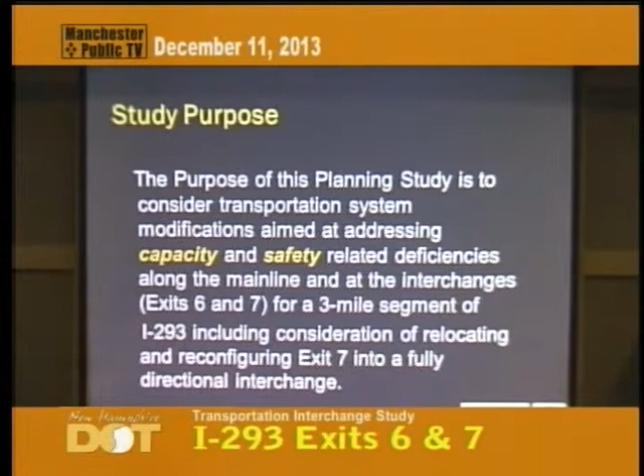Study purpose, we talk about this at each meeting. The purpose of this planning study is to consider transportation system modifications aimed at addressing capacity and safety related deficiencies along the main line and at the interchanges, exit 6 and 7, for about a 3-mile segment of I-293, including consideration of relocating and reconfiguring exit 7 into a fully directional interchange.

We've been working very closely with the Technical Advisory Committee. They've been very helpful to us throughout the process. That committee included not only the New Hampshire Department of Transportation and the Federal Highway Administration, but also representatives from the Southern New Hampshire Planning Commission, representatives of the City of Manchester, the Town of Goffstown, Town of Hooksett, the Greater Manchester Chamber of Commerce, the Hooksett Chamber of Commerce, the Manchester Community College, and also Senator Boutin sits on that committee.

Throughout the study, we've really tried to focus on public outreach and provide as much information as possible. And in doing that, as I said, we've had 5 public informational meetings. So this is our 5th and final meeting for this planning study. We also met 9 times with the Technical Advisory Committee. And then we had a series of briefings with each of the communities: we met once with the Hooksett Town Council, once with the Manchester Board of Mayor and Aldermen, once with the Goffstown Selectmen.

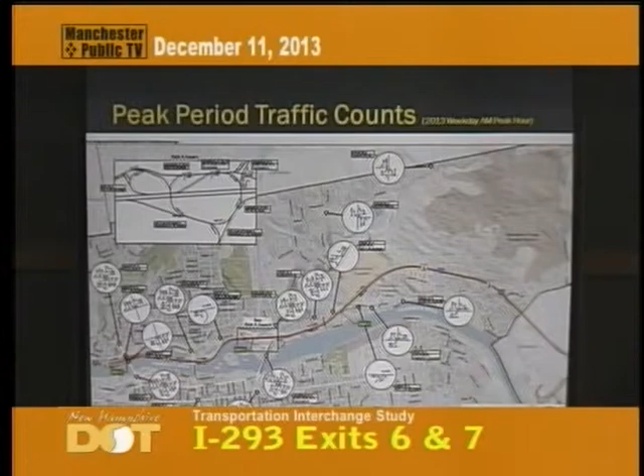Anyway, let me step through, before I talk about the alternatives, some of the initial data and information that we have collected. First off, back at the very beginning of the study, I talked about how we had gone out and collected traffic volume counts, both during the morning peak periods and the evening peak periods, at about 24 intersections through the study area. In addition to that, we had round-the-clock 24-hour counts on a number of roads and the highway and ramps throughout the study area.

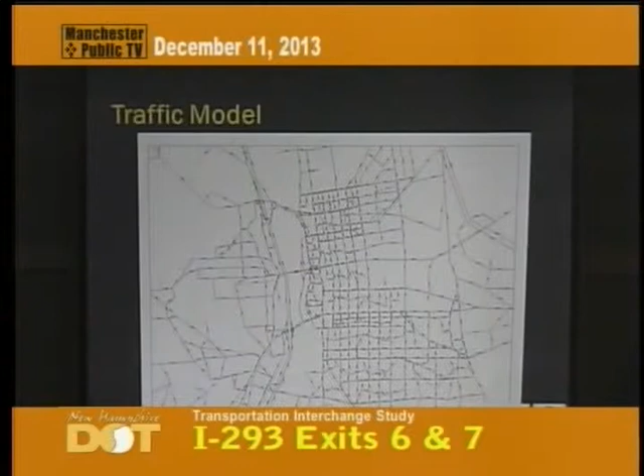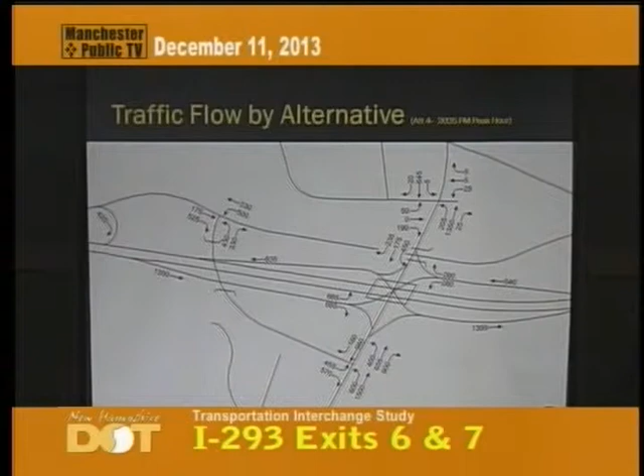The Southern New Hampshire Planning Commission is on our team. They have a regional traffic model, and working with us, they were able to not only help us with the projected traffic into the future, but when we looked at each of the alternatives, we were able to look at what type of traffic diversions would occur based on the new configurations of each of the alternatives. And I'm not going to go through all these numbers here, but for all of these alternatives that we'll talk about tonight, we have traffic volumes at each of the various configurations and for each of the various alternatives.

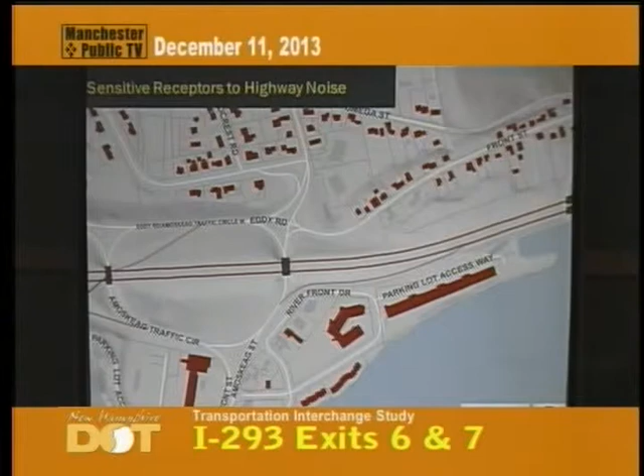We have a number of sensitive receptors to highway noise. Anytime you're doing a highway project, you need to be concerned with the noise effects to sensitive receptors. We've identified in the red areas residential areas, which are important when you're considering what the impacts to those areas could be. Rare, threatened, endangered species or habitat, we've identified where those are, and again, as we move forward and look at the various impacts, we need to be considering those resources.

And also hazardous waste. We've identified a number of site locations where hazardous waste has been identified, including the Manchester landfill, and there's actually a groundwater management zone that extends from the landfill over to the river. All of those need to be considered as we're moving forward and looking at the alternatives.

Poor sight lines along the corridor with curves along the corridor. Queuing onto the highway with traffic from the ramps back out onto the corridor. High-speed weaving, particularly in the southbound direction at exit 6. We have heavy traffic entering and exiting in very short distances. Short on-ramps where there's not a lot of acceleration length, and as soon as you enter the ramp, you're onto the highway itself. Vehicle crashes, confusion, congestion up on the Amoskeag Circle. Again, as I mentioned, highway noise. Limited truck access between Goffstown and the highway.

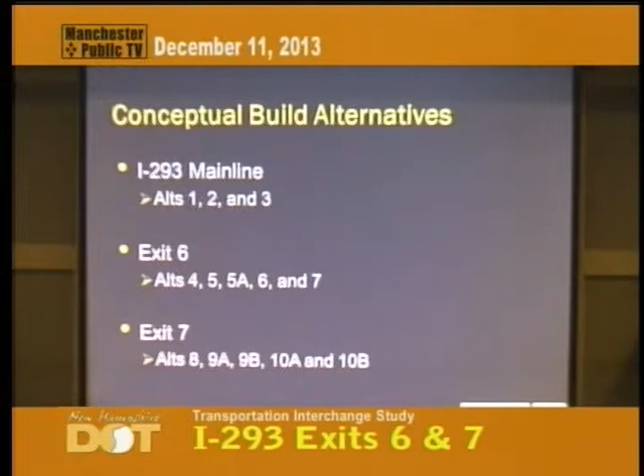For the I-293 main line, we've identified 3 alternatives, alternatives 1, 2, and 3. For Exit 6, we've identified 5 alternatives, alternatives 4, 5, 5A, 6, and 7. And for Exit 7, we have 5 alternatives as well, alternatives 8, 9A, 9B, 10A, and 10B. So let's just step through these. We're going to start first on the I-293 main line. As I said, we have 3 alternatives.

The first alternative, alternative 1, I don't actually have a picture of it, because alternative 1 says, can you keep the main line exactly the way it is? 2 lanes in each direction, leave the curves the way they are, and only look at the interchanges. Can you fix the interchanges but leave the main line exactly the way it is? That's what alternative 1 is.

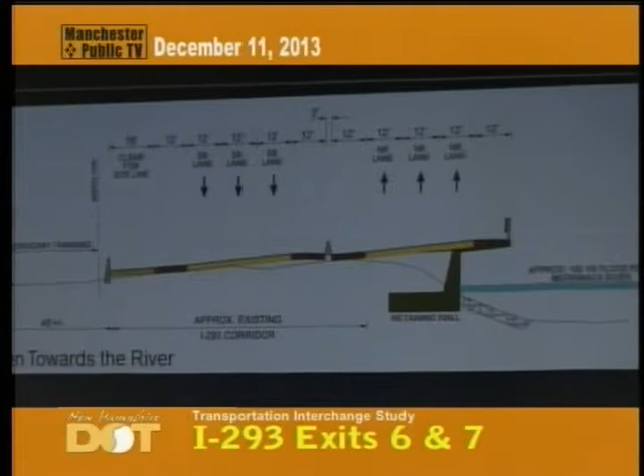You'd have a clear area here because you're going around a curve, so you need a clear sight line there. And you have a shoulder, three 12-foot southbound lanes, a median area, three northbound lanes, and a shoulder area. And notice what we've done under this alternative: even though we're pushing towards the river, to minimize the impacts to the river, we're showing a cantilever section out over the river, extending the highway out over it as opposed to building retaining walls down into the river.

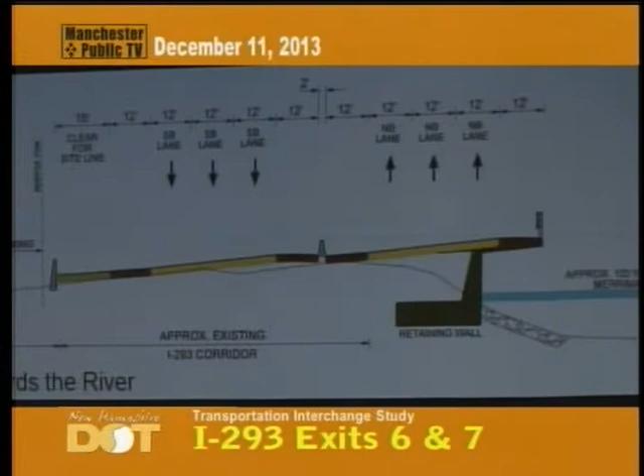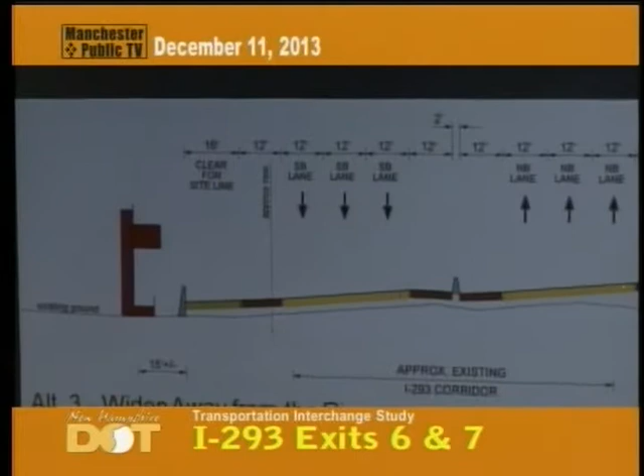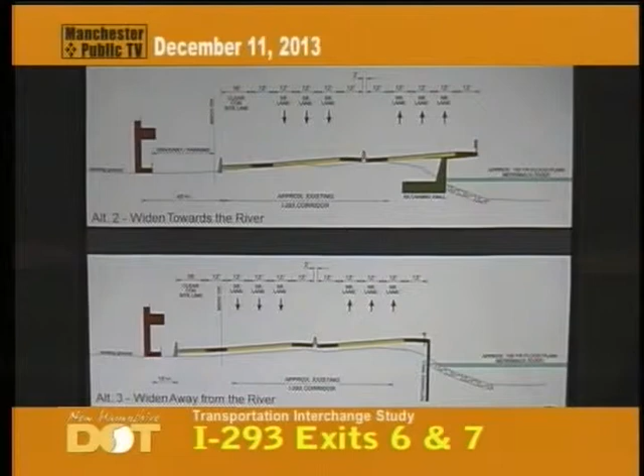If we look at alternative 3, the one on the bottom here, this one pushes away from the river, holds this edge at this point, still three lanes in each direction. You have your clear line, and here you see we're not into the building, but clearly we're into that parking area, which would obviously affect the operations of that building. So with alternatives 2 and 3, all we're talking about is an extra lane in each direction, but the question is, which way do you move the highway through that particularly sensitive area?

Now let's move up to exit 6. At exit 6, the issue today is you have all types of congestion and confusion up on the circle. You've got traffic, particularly on this northbound off-ramp, that backs out onto the highway and even around the curve in here. You've got traffic entering on the northbound ramp with very short acceleration length. Once you enter, you're onto the highway.

In the southbound direction, you've got this tight weave here with heavy volumes exiting and heavy volumes entering at the same point. And you have this small ramp here at Eddy Road where, once you get through this traffic, you have more traffic jumping on. So those are some of the issues that we're trying to address. So let's look at the first alternative.

Alternative number 4 is what's called a single-point urban interchange. It would be located here at Amoskeag Street and Goffstown Road. All of the ramps would enter directly into a single signalized intersection. It would be a very similar operation to what you have at Granite Street at exit 5.

The only difference is that under this alternative, the interchange would be above the highway and the highway would run underneath. At exit 5, it's the other way around, where the interchange is underneath and the highway runs above it. The way this would operate is that all of the movements and ramps would come in at a single point here. You'd have access to the city in this direction and to Goffstown in this direction.

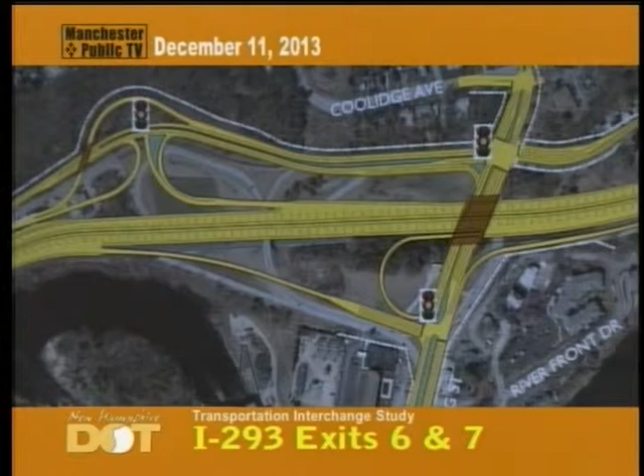And the last alternative we have for exit 6 is alternative 5A. We call it sort of an offset diamond interchange. It's sort of a combination of some of the different movements. And what that would be is in the northbound direction, you would have an off-ramp that comes into Amoskeag Street, and you'd have a northbound on-ramp that enters on this side. You would have a full intersection at Front Street, Goffstown Road, and Amoskeag Street.

And then the southbound ramps would be down here. We would come off, come into this intersection, or get on at this point. All of the traffic that comes from, say, out of Manchester and wants to head south on 293 would come down to this intersection, come in here, and rather than going through the signalized intersection, we get on a ramp over the top and then enter the highway that way. So those are the alternatives that we've looked at for exit 6. Let me just quickly step up to exit 7.

This is the existing location of exit 7 at Front Street. As I said, today there are only ramps to and from the south. We want to be able to get ramps to and from the north as well. As I said earlier, what we're also looking at here is not only addressing the problems at exit 7, but we are also evaluating the potential of relocating 7 further to the north.

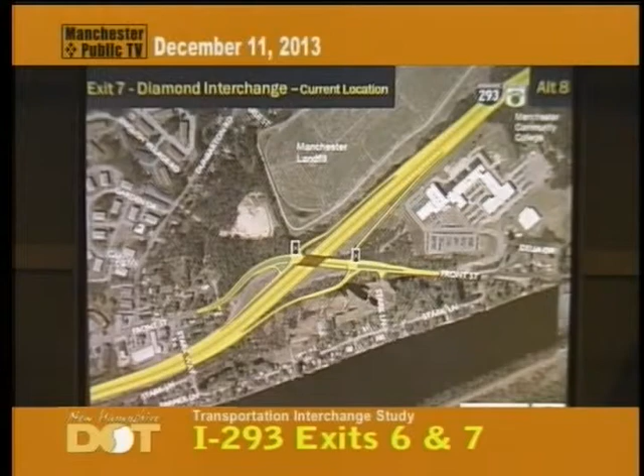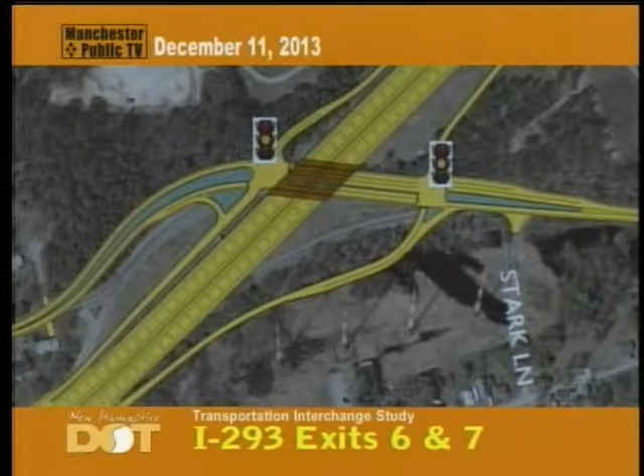However, one of the alternatives is to look at, is it possible to reconfigure the interchange at its existing location? And that's what alternative 8 is. Alternative 8 tries to reconfigure the interchange, provide both ramps to and from the south, and also ramps to and from the north at its existing location. And you can see it's tight there, trying to get those ramps in between the landfill and the community college, which is located right here.

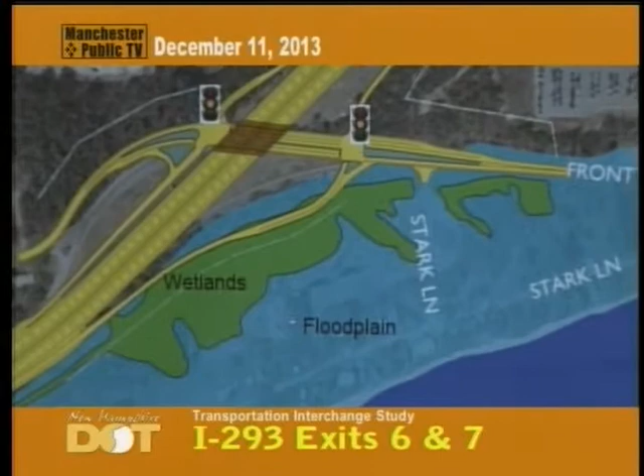Also, if you remember earlier, I was talking about the environmental resources. There's a wetland area right down in this area where we want to put in that ramp. The other thing I want to mention about the idea of reconstructing exit 7 at its existing location is you need to consider the proximity of exit 7, Front Street, to what we would do at exit 6. Those interchanges are fairly close.

And what that would mean is if you reconfigure exit 7 at its existing location and reconstruct exit 6, the distance between the on-ramp here and the off-ramp here is relatively short. It's about 1,400 feet. Now, we've looked at different ways of how it would operate, and from an operational standpoint, we can get the traffic volumes to operate acceptably and safely, but in order to do that, there needs to be a relatively short section in the middle here that actually has an additional lane, a weaving lane.

So when I said there were 3 lanes in each direction, for a very short distance in here, if this interchange is here, there'd be an extra 4th lane. The downside to that means that there are more impacts to the properties to the back of Front Street and in the area of Stark Lane, because now you have a slightly wider section of corridor. So those are things, again, that need to be considered.

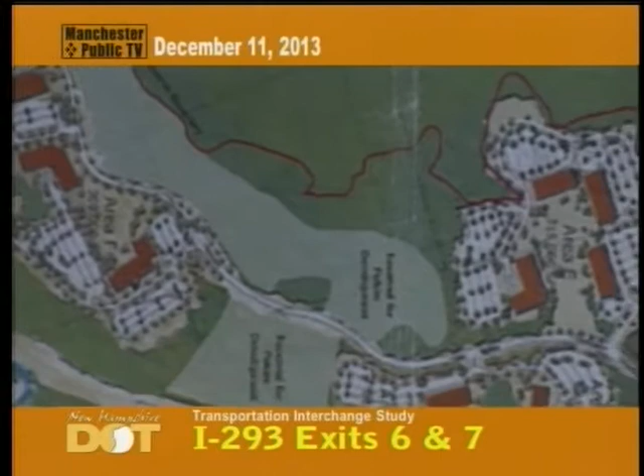And I'm not saying this is necessarily going to happen or this is exactly what's going to be, but the city has put together a master plan and said, well, this is an area where in the future this may be redeveloped. And we knew that going into this, and so when we laid this out, this is the Exit 7 reconfiguration, we made sure that lines up so that if this happens, this could connect into that piece.

Secondly, as I mentioned, the town of Goffstown has an industrial area up here. They would like to see in the future opportunities to bring businesses into that area. And they look at this as an opportunity. If we can improve the connections to 293, this would be an opportunity to do that. So again, I lay those out as just considerations that we need to be thinking about as we're moving forward, of all the advantages and disadvantages of each of the different alternatives.

All right, with that, let me step through. I'll try to do this again as quickly as possible and then get to summarize our findings. I want to run through the evaluation of the alternatives. So how did we look at all those alternatives and how did we evaluate those?

First, let me say that when we tried to do the evaluation, we broke it out into these areas. One was highway needs. Remember I said the study purpose is about addressing the capacity and safety issues along the corridor. So that's our primary study purpose. So obviously any alternative we need to make sure meets that study purpose. Are we actually improving capacity and safety?

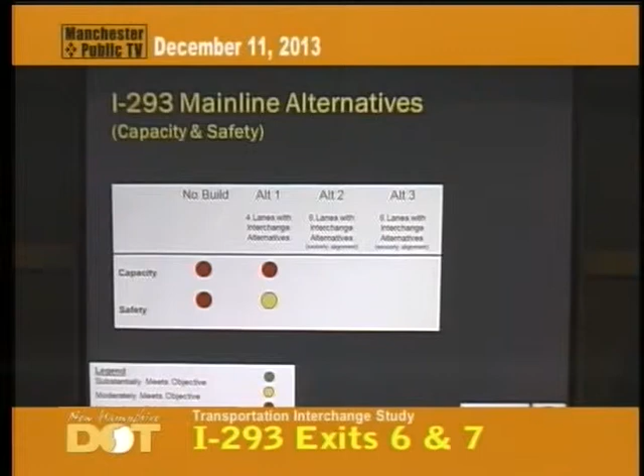And so if you look at the no build, it means we don't do anything. Under the no build, obviously, we're failing to meet the objective of improving capacity and safety, so they get red. Under alternative 1, that is, leave the main line alone and just concentrate on the interchanges. From a capacity standpoint, our analysis says that when we project traffic out 20 years from now, that won't be enough. You're going to need that additional lane. And so we would not meet the capacity criteria under alternative 1. Obviously, if you can upgrade the problems at the interchanges, you are starting to address the safety issues, and so for that reason, from a safety standpoint, alternative 1 would fit into the moderately meets the objective.

Now, if we look at alternatives 2 and 3, this is adding an additional lane in each direction. The only difference being which way we move the highway. And again, all we're talking about in this table is capacity and safety. So we're not measuring it on what the impacts are to the river or the historic district. Under those, both alternatives 2 and 3 would substantially meet the objectives of improving the capacity and improving safety.

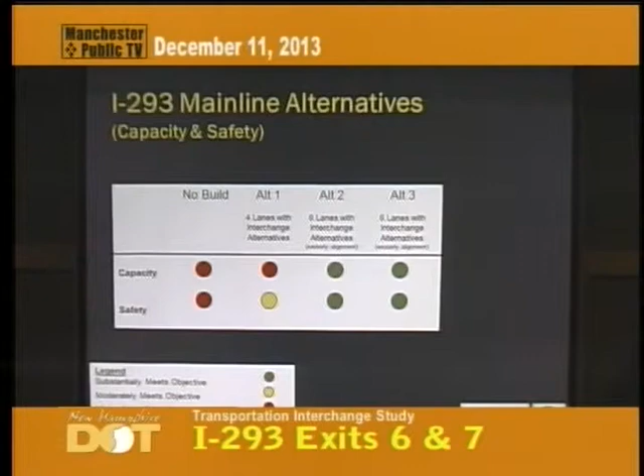We move to the alternatives for exit 6. Again, same thing. We have a no build, and then we have each of our alternatives. Alternatives 4, 5, 5A, 6, and 7. Again, all we're doing here is measuring how well we're doing against improving capacity and safety. Obviously, under the no build, you don't do anything. We're not going to address capacity and safety. For alternative 4, that's the single point urban interchange. Our analysis says that from both a capacity standpoint and a safety standpoint, we would substantially meet the objective under that alternative.

If we look at each of the diamond configurations, the standard diamond, the offset diamond, and the diverging diamond, each of those, from a safety standpoint, would completely address the safety issues. They fall into the category of moderately meeting the objective because we can get acceptable levels of service at those intersections. However, under the diamond configurations, there are some issues with respect to queuing between the signals and some of the spacing between the signals. And so for that reason, it doesn't distribute the traffic quite as well as the single point interchange. But we would characterize each of those alternatives as moderately meeting the objective of capacity.

And the final alternative, alternative 7, is the one with the roundabouts. And our analysis shows that from a capacity standpoint, that's not going to work. And so this is probably the last meeting you're going to hear about that alternative, because it simply doesn't work from a capacity standpoint. Obviously, it works from a safety standpoint because it would improve the situation out there today, but it doesn't work from a capacity standpoint.

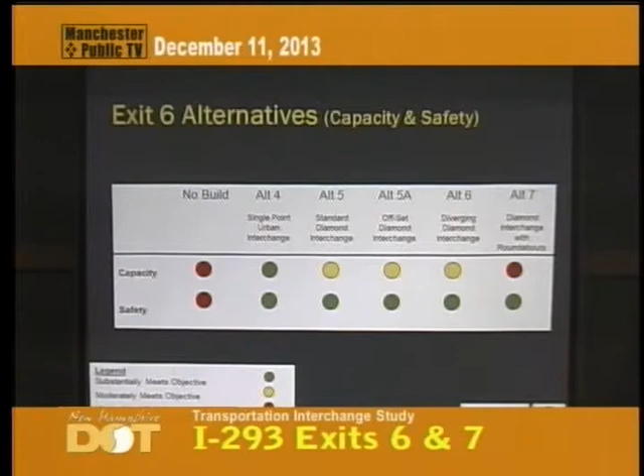So let's move up to exit 7. Again, alternatives for exit 7.

Same thing. You don't do anything. You're not addressing either capacity or safety. Alternative 8 is reconfiguring exit 7 at its current location at Front Street. And under that scenario, our analysis shows that operationally, we can make it work. Safety, it's certainly an improvement, so we put it in the category of moderately meets the objective.

But what we need to keep in mind here is that issue of the spacing between exit 6 and 7. And again, it's not an ideal situation. Those interchanges ideally should be set further apart. And so that's why it falls into the category of moderately meeting that objective.

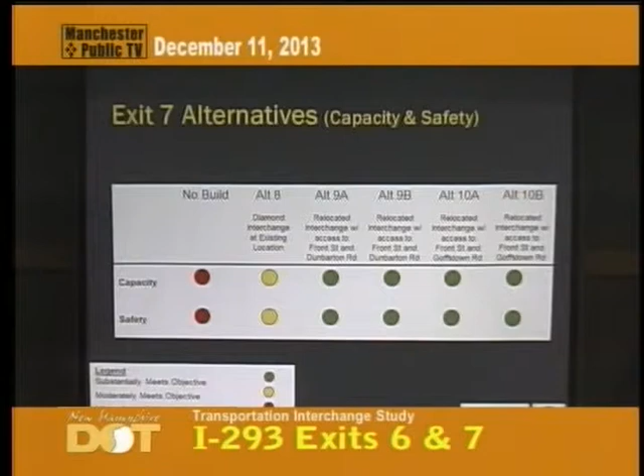Now, each of the alternatives of relocating the exit 7 interchange further to the north, both alternative 9, which connects to Dunbarton Road, and alternative 10, which actually goes over the river and extends over to Goffstown Road, from a capacity and a safety perspective, both of those substantially meet those two objectives. Now again, we haven't talked about the economic benefits yet. Simply from a capacity and a safety perspective, relocating the interchange further to the north meets that objective.

So what I want to do here, and I'm not going to go through all of them, but from an economic perspective, and as I said earlier, any improvements to the corridor in exit 6 or exit 7 is going to improve the economic vitality of the entire region. However, specifically part of this project, what we've heard from the City of Manchester and the Town of Goffstown is they're particularly interested in what's happening at exit 7. So I'm going to focus here on the exit 7 alternatives, on how they fall from an economic consideration.

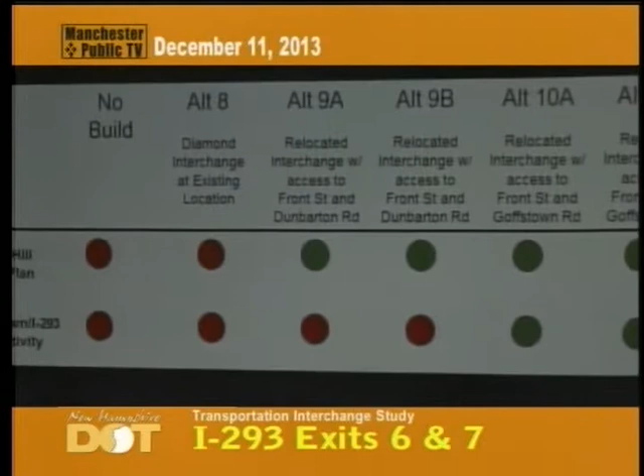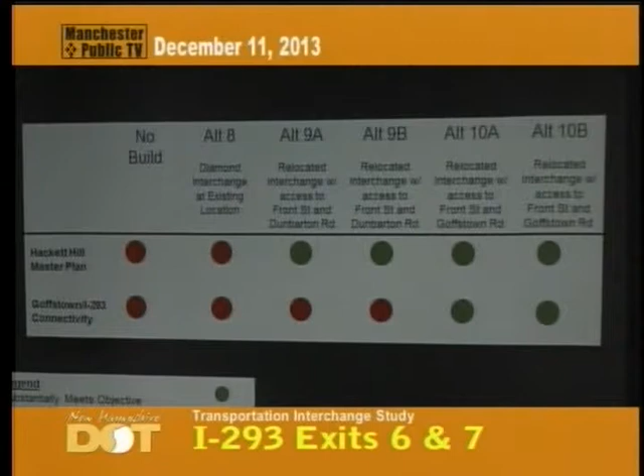Alternative 10, which extends across the Black Brook, would obviously meet the objective both from the Hackett Hill standpoint and from improving connectivity to Goffstown. That's sort of how the alternatives break down relative to how they meet the capacity, safety, and the economic considerations.

So let me just very quickly touch on some costs. Going back to exit 6, and again, these are just construction costs. They don't include right-of-way costs. There's other costs involved, but we want to be able to compare apples to apples here. And so just construction costs at these interchanges, these are fairly substantial costs. A single-point urban interchange, to construct it would be somewhere between $54 and $60 million. Each of the other diamond configurations there would run between $38 and $45 million.

We come up to exit 7, reconstructing exit 7 at its existing location. That's alternative 8. It would be running between $33 and $36 million, and relocating the interchange, but not crossing the brook, just going to Dunbarton Road, would run between $36 and $41 million, and then ultimately, if you extended across the Black Brook, the cost would be in the order of between $42 and $48 million. So I just want to give you a sense of the range of dollars that we're talking about for these interchange upgrades.

So with that long-winded presentation, what I'm going to try to do here is just summarize for you our findings. After all of this analysis, after all the meetings we had, what does it all say to us? And then when I finish that, we're going to talk about what are the next steps and where do we go from here. So let's talk about our findings.

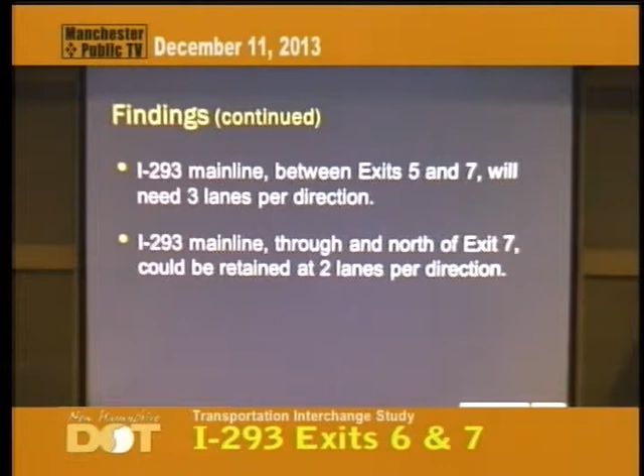Each of the exit 6 alternatives, with the exception of the diamond interchange with the roundabouts, operates acceptably and meets the study purpose. So what that means is that as we move into the next phase, you're probably not going to see the alternative with the roundabouts anymore because that's really going to fall out. It doesn't work. I said the single point interchange probably operates the best of them, but the other configurations operate acceptably, and you may not want to throw those out just yet.

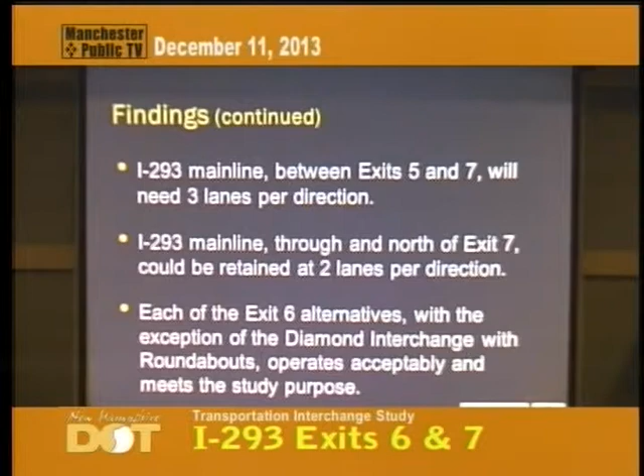At exit 7, reconfiguring exit 7 at its existing location could be problematic given the close proximity of exit 6. What that means is, our analysis shows you could reconstruct exit 7 at its existing location, and we can get acceptable operations, but it's not ideal. And there will always be an issue with the spacing between exit 6 and exit 7.

Finally, relocating exit 7 to the north will meet the capacity and safety study purposes, and it will also support connectivity to the important future economic development areas, both in Manchester and Goffstown. And so, everything that I talked about, I tried to wrap it all up. This is what the study says at the completion of the planning study. Those are our findings. That's what we're reporting to the New Hampshire DOT.

And now let me just quickly talk about next steps, where we go from here. These major infrastructure projects, like reconstructing interchanges, go through this 3-part stage. Part A is the planning study. That's the study that we've completed. At the end of this month, end of December, the planning study is done. This is the final meeting on the planning study.

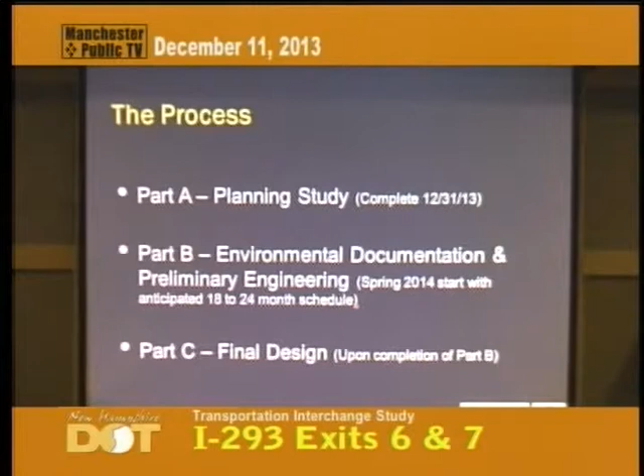And so again, just let me recap. We are completing the planning study this month. The planning study is going to be done. We're going to move into Part B, environmental documentation, preliminary engineering, and again, the interchange modification report. That will start hopefully in spring of next year. We expect that to extend about 18 to 24 months. And then if that goes well, after Part B, you move into Part C and final design. So, Dave? Marty, thank you for that detailed presentation.

So in an effort to keep us moving right along, let me transition right into the question and answer period or comment period. First, let me open it up to elected officials. If any of you folks want to come up, first, give the opportunity to Mayor Gatsas if you'd like to come up and offer any comments. Okay. Senator Boutin.

Thank you very much, Marty. What I would just like to do is echo what Mayor Gatsas said the first meeting we had over at the Manchester Community College. And that is, and I think most of you would agree with me, that if we're going to do this, let's do it once. So let's get it right. Let's do the full solution and not a partial solution so that we have to go back and do this all over again in 5, 10 years, whatever. So I have been involved from the very outset.

One of the areas that I am very concerned about is particularly noise issues for my good friends who live over on Riverfront Drive. I want to make sure that this project does not affect their quality of life over there. But I am very pleased with the work that you have done, and I think you've come up with some good alternatives. And getting this project done is meaningful for two reasons. One, and most importantly, public safety. More so than economic development. Public safety.